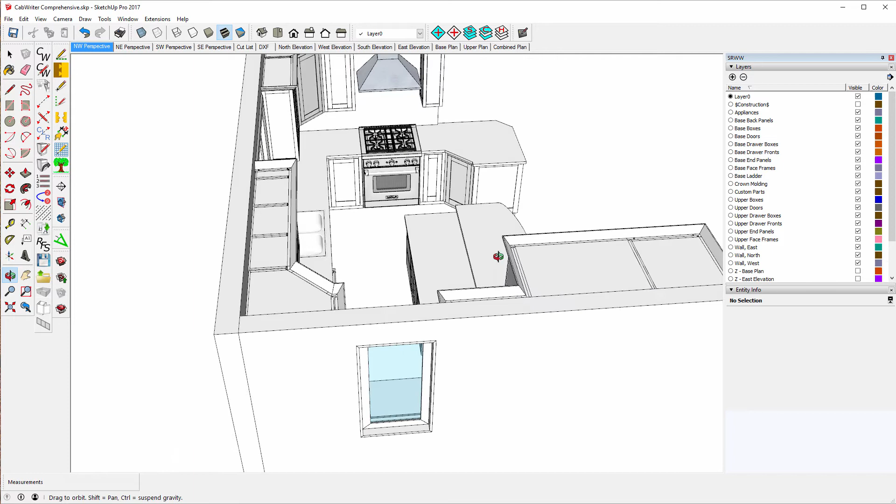This is your standard sink cabinet with the false drawers. And over here, this is a typical cabinet where you might put cookie sheets or something like that. And a diagonal base cabinet, which forms a small island, which has been trimmed with paneling on the back.

Corner cabinets, standard cabinets here, corner cabinets here and here. And I've already explained this is a divided upper, and this is a standard upper cabinet. So we've got a little bit of everything.

And we're going to go through this entirely. I'm going to do it in multi-parts, and I'll try to keep the pace somewhat slow so that you can actually follow along. The whole goal here is to learn CabWriter with all of its little secrets, if you will.

So let's get started. Probably the best way to start out is to look at how you start a CabWriter project. Oh, before I do that, let's stay with this for the moment.

Once you have actually created the cabinet design with all the cabinets and all of the trim and everything else you want to put in it, you want to create a number of scenes. And here are a set of typical scenes.

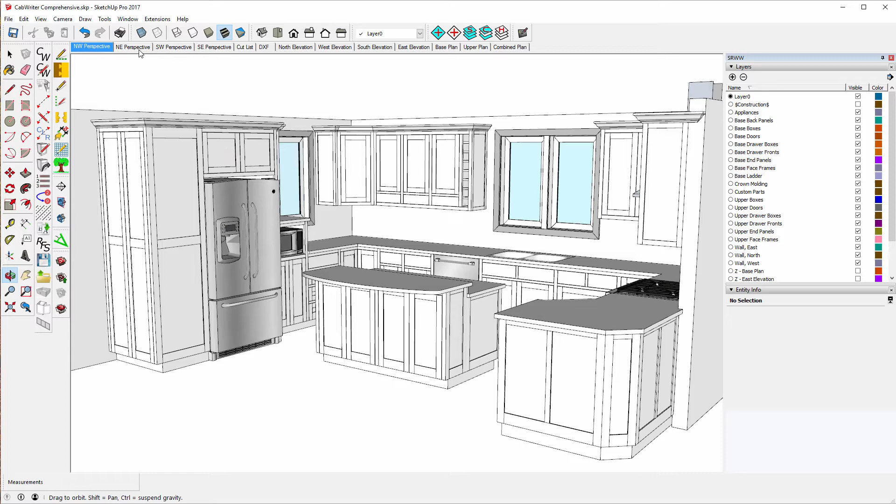In other words, it looks in this corner between the north wall and the west wall. I've got a northeast perspective, which looks in this corner between the east wall and the north wall. And then, to see the fronts of this cabinet and the island, I have a from-above southwest perspective. In other words, it looks at the west wall—I'm sorry.

That really should say southeast perspective, because it's actually looking at the east wall and the south area. So that's mislabeled. Here you can see the oven, the hood, and the front of the diagonal cabinet.

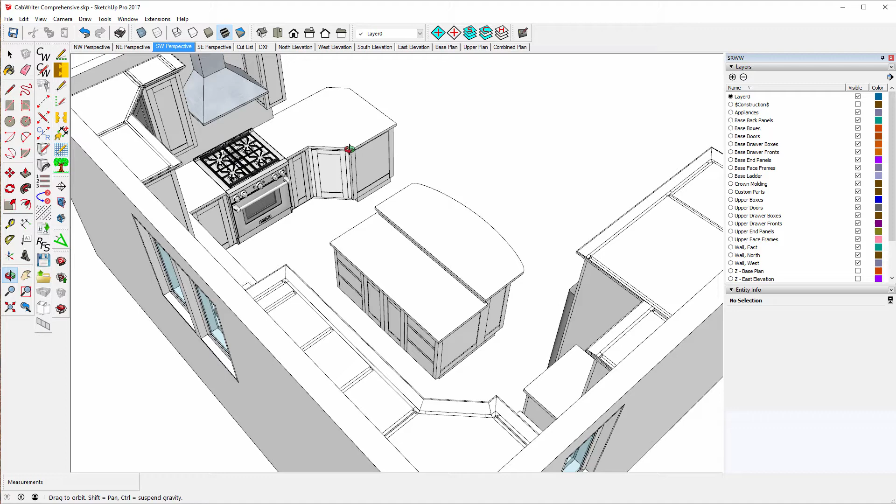And of course, now we've got the southeast, but what is really the southwest perspective. You can see the island, the refrigerator, and the microwave oven, and what have you. So these are just various perspectives to give the client a good view. Of course, you can always rotate around here and get a good view too.

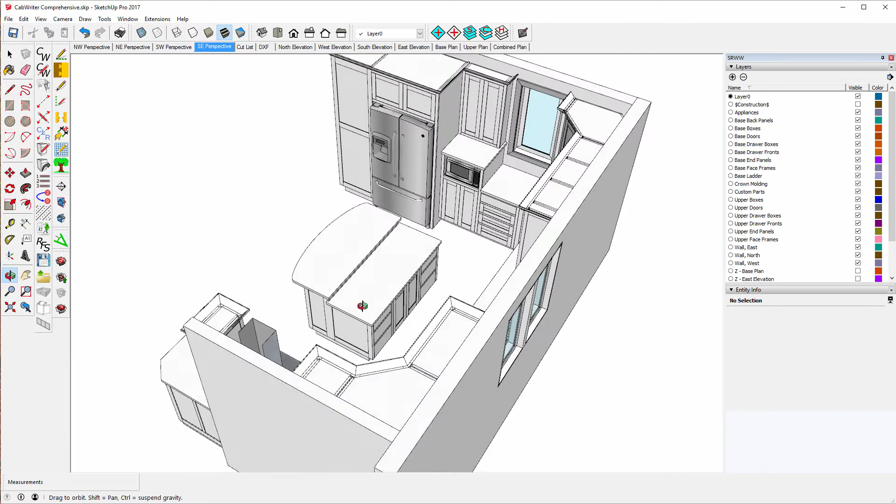And then we get to the important views for creating shop drawings. First thing we want to do is create cut lists. Normally what we want in a cut list is all of the hardwood, all of the sheet goods, all of the trim, or anything else that's in the project that is going to exist as raw materials in your shop so that you can mill parts. And that's what we put in the cut list.

And from there we can create a cut list, and it's simple. I'll show you what you want to do from this cut list scene. By the way, the cut list scene probably wants to be drawn in isometric, or what we would call parallel projection. In fact, all the scenes except these perspective scenes want to be drawn in parallel projection.

In order to create a cut list, all we need to do at this point is select everything: Edit, Select All, and then File, Cutlist Bridge, export to either Cutlist Plus FX or export to Microsoft Excel or OpenOffice, whatever it is you have that supports your process.

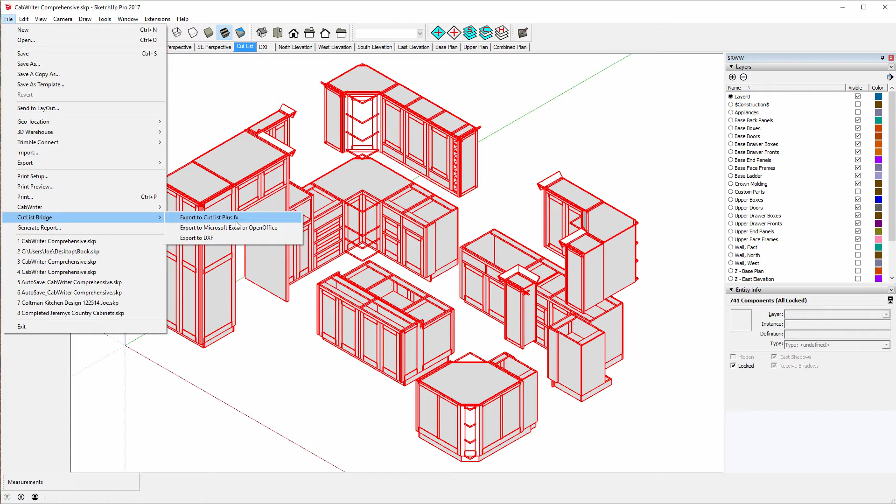I'm going to say export to Cutlist Plus FX. Very quickly, I get this dialog box that says a cut list has been written to. Now it's going to place that file called CabWriter Comprehensive.cxp, meaning CabWriter export.

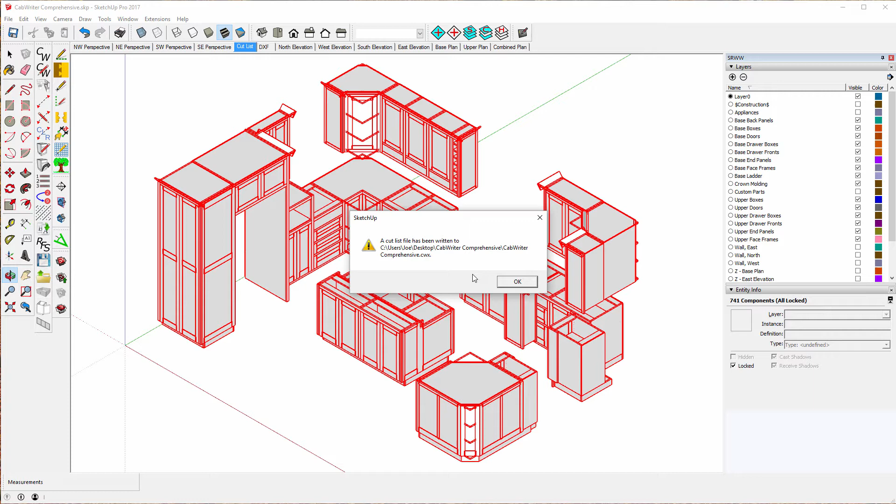And it's going to place it in the same folder that the model itself is in. So wherever this model is, you will have a CabWriter Comprehensive.cxp. The reason for CabWriter Comprehensive is that's the name of this model, and it's the name of this course, so it's the name I used for this file. I'll show that to you in a moment.

The next thing we want is we want to export our DXF files for CNC cutting. In the CNC view, what we want are sheet goods, because that's what we're going to cut on a CNC machine. So this just has all of the sheet goods.

As we go through designing this model, or drawing this model—actually it's already designed—as we go through drawing this model, you'll see what happens with sheet goods and what layers they go on, and so on and so forth. But let's not pay attention to that now.

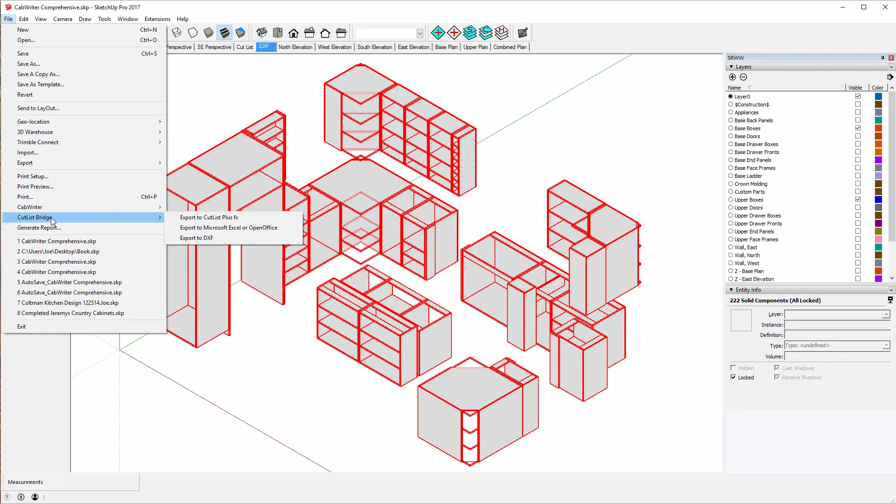All we really want is to be able to select the DXF scene, say Edit, Select All, File, Cutlist Bridge, Export to DXF. Again, this time what it's going to do is put a folder in the same place that this file, this model, is. So wherever your model exists, it will put a folder with a bunch of DXF files in it in that folder.

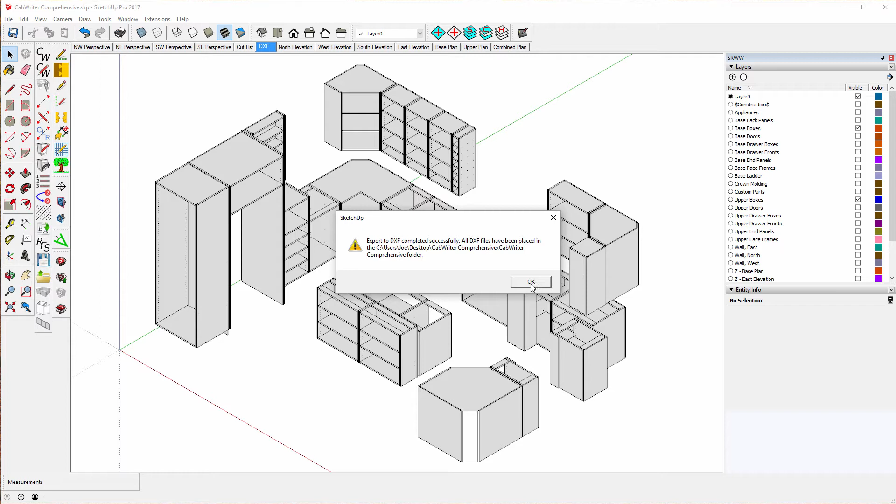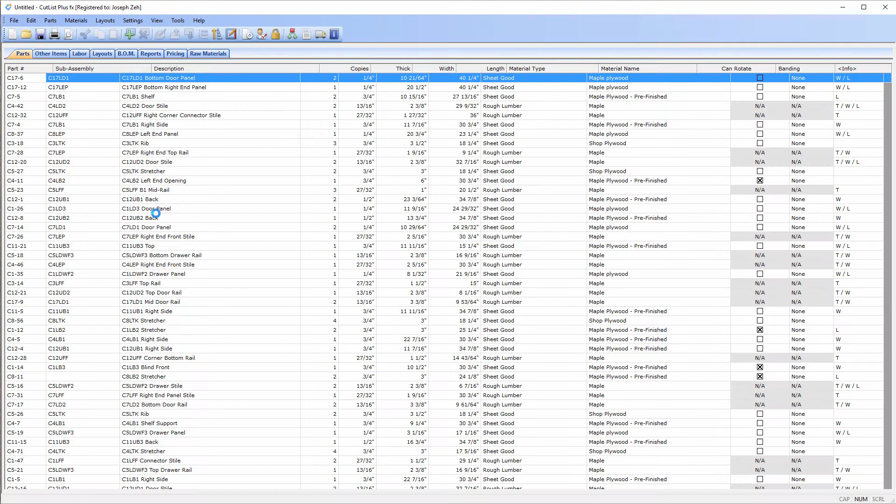So let's now go look at the files we produced. We'll start with the Cutlist file. Here in the CabWriter folder, where the model is, here's the model we've been looking at, we find the CabWriter Comprehensive.cxp file. All we need to do is click on that, and the CabWriter Cutlist Plus FX file opens up, and we can see all of our parts.

And there are a lot of them. I can do a number of things, like sort by part numbers. If I go to the top here, some pieces don't have a part number or a subassembly.

Those are simply the crown molding pieces that are around the top. But all of the cabinet pieces have part numbers, starting with C1, and not necessarily going in order, because the way sorting is done with characters like this is you go from C1 to C10 to C11 and so forth, and then start at C2. But anyway, they are sorted by cabinet number.

C1 is cabinet 1, dash 1, which is part 1 of cabinet 1. And you can see cabinet 1 has, somewhere in the neighborhood of, well, cabinet 1 has 55 parts. And each part has a subassembly number.

For instance, C1L—L means lower cabinet, and B means box. So this is box 1, box 2, box 3. It's a 3-box cabinet, so these are the box parts. These are the drawer parts, the drawer front parts, face frame parts, so on and so forth, toe kick. So they're organized by subassembly.

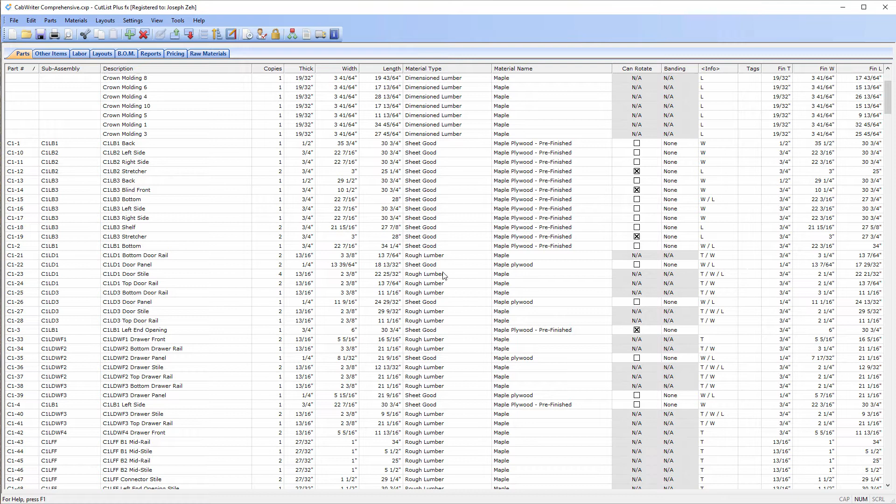Okay, so that's all of the parts, but what we really want are layouts. And there we have it, the layouts. Now, I've got a bunch of different types of material here. I'm going to choose the maple pre-finished 3/4 inch material. We'll see all of the sheets that are used in this design.

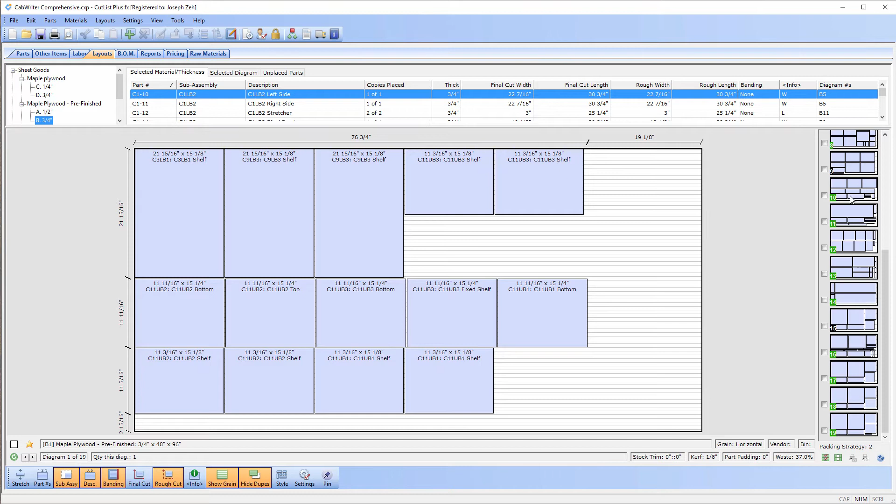There are 19 of them, and you can see each sheet here, and if you want to see each sheet in detail, like this one perhaps, you can bring it up here and look at it in detail. Notice if we start at the bottom and look at this, how the sheets are used very efficiently, very little space left over. All the way up to the top, the last sheet has some offcuts, but that's it—everything else has been used and used very efficiently.

So this program called Cutlist Plus FX is not part of CabWriter and it's not part of SketchUp. It's Bridgewood Design, who designed and sells this. It's a very, very useful application. Of course, the most important part of it is plywood optimization, but it also gives you things like a bill of materials—it tells you what this thing is going to cost in terms of materials. It also creates some really nice information that allows you to create a project costing.

If you provide things like taxes and other things, and hourly wages and that kind of stuff, and how long it takes to do each sub-assembly, you get a project costing sheet with all kinds of reports that you can choose. But the most important part and the most efficient part is this layouts thing.

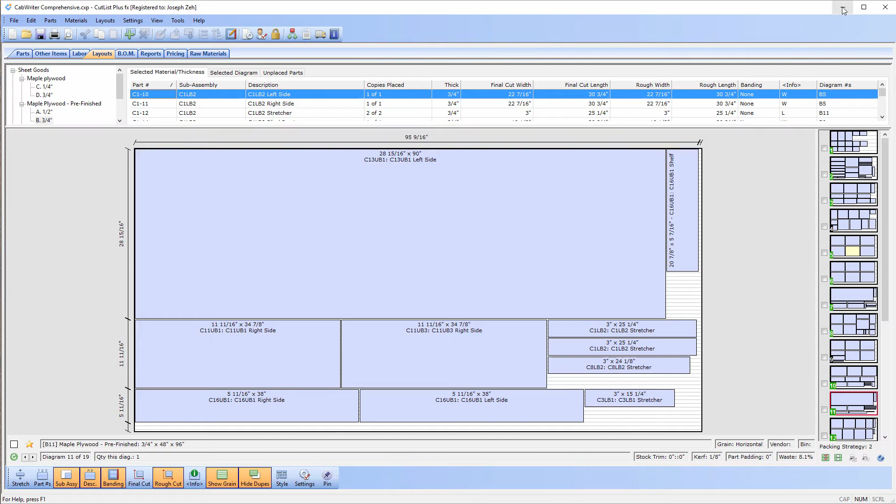All right, so that's one type of cut list. If you're going to go to a CNC machine, you might want to go to something like Cut2D Pro, and that's why we produced this folder with all of the DXF files. We're going to look at the 3/4 inch maple plywood pre-finished again, but this time in Cut2D Pro—again, a third-party application.

Let's start a new project here, and the material is going to be roughly a 4x8 sheet of plywood. We will import vectors from this folder that we exported, and I'm going to use the 3/4 inch maple plywood pre-finished. I want to preview them—this will take about 10 seconds here as it works. You can see it working along the bottom here.

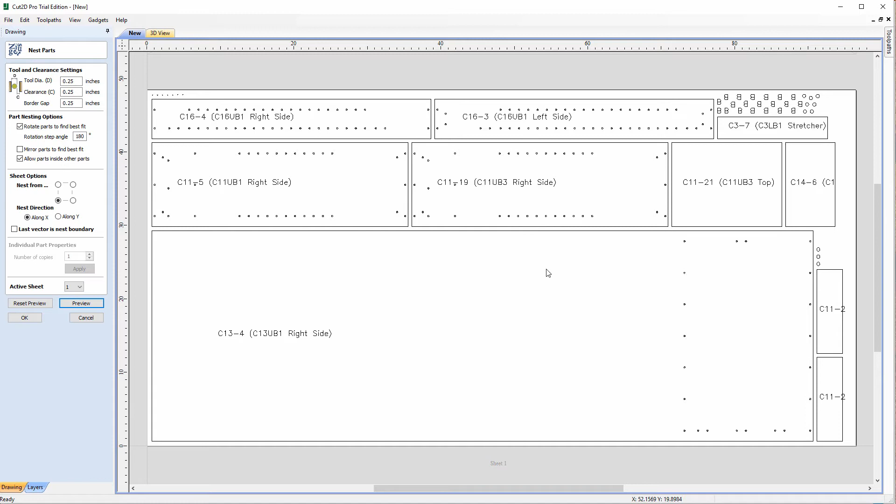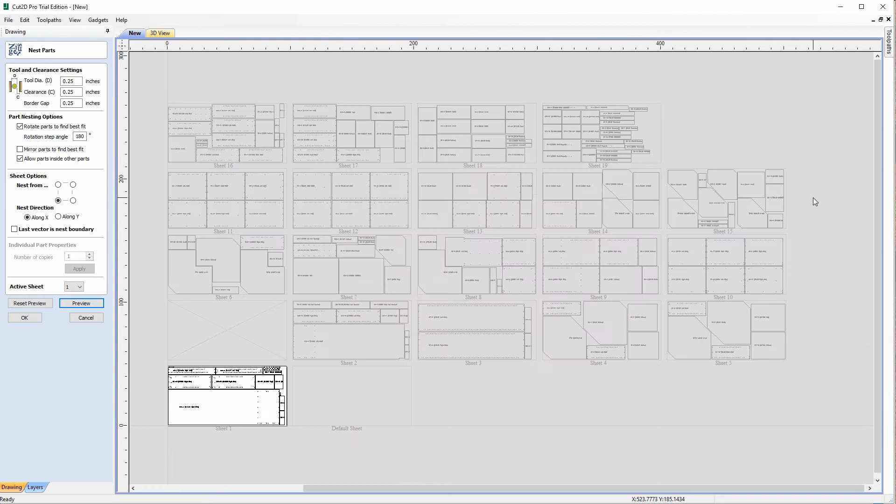And there we go, this is sheet number 1 right here. And if I want to see some other sheets, I can scale this down. Let me scale it up just a little bit and see if I can center it. This is a very difficult program to operate in terms of centering.

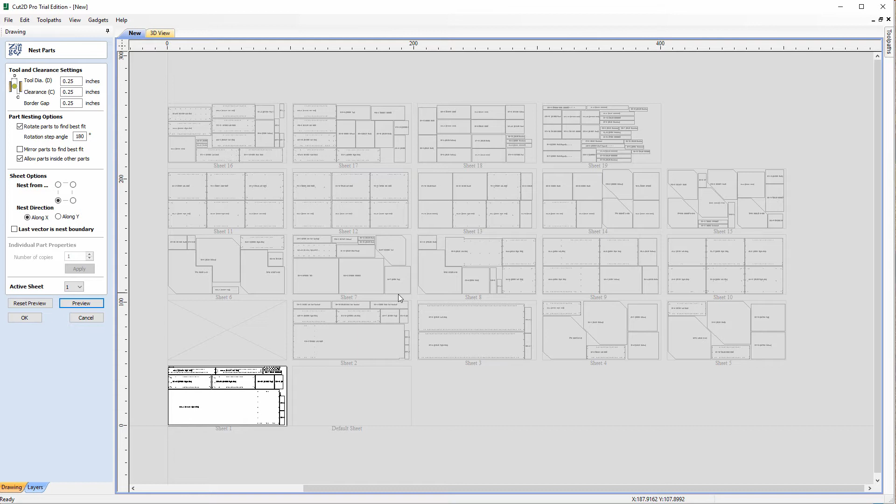Okay, so this is sheet number 1, and this up here you can see is sheet number 19. So again, it uses 19 sheets, but you can see it's laid them out—you can see the part number, the part name, the component name, and all the holes that are going to be drilled by the CNC machine and the shapes that are going to be cut out, all of these diagonal shapes and what have you. And again, it's optimized to 19 sheets with very little offcut.

So this particular program, Cut2D Pro, produces the software necessary to go directly to a CNC machine. I'm not totally aware of all the different types of CNC machines it supports, but a large number.

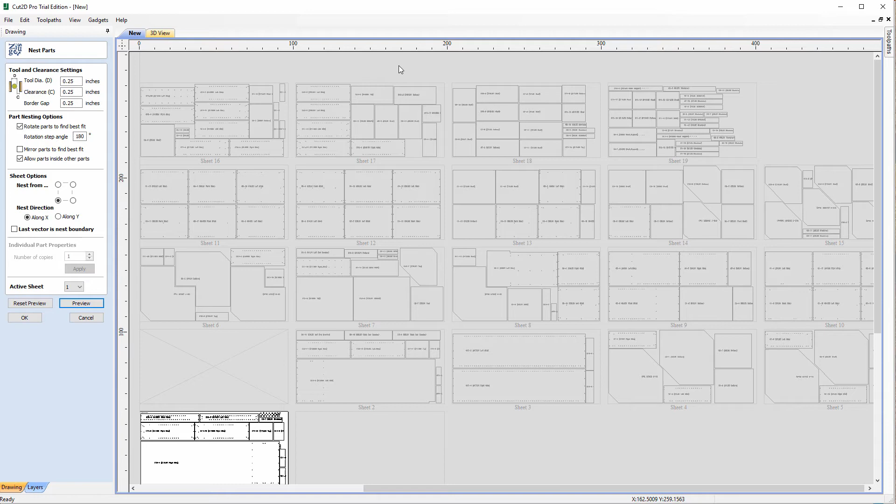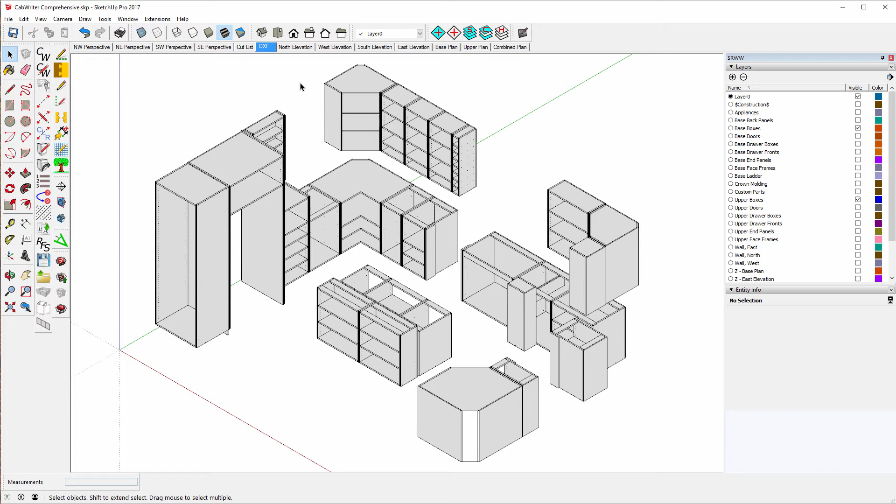Okay, so let's go back to our model. The next thing we want to look at are elevations, because one of the things we're going to want to do is create professional looking drawings, and we'll do that in layout. We could do it here in SketchUp, but if you're a professional, you'll want to buy SketchUp Pro, which comes with the layout program, and you can do dimensioning and things like that with a very professional set of drawings with title blocks and things like that. To do that, we create these elevation drawings—that's the north elevation, looking at the front of the north wall.

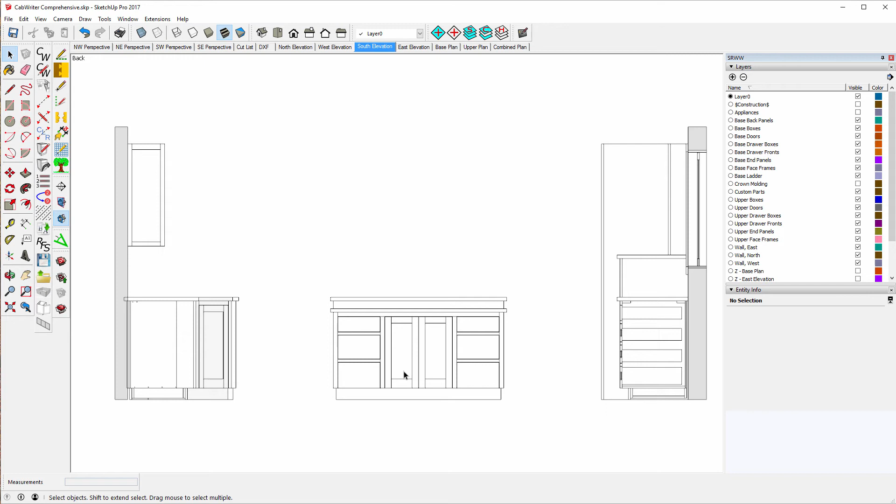The west elevation. The south elevation, that's looking at the island, standing in front of the kitchen sink, looking at the island. The east elevation.

And then you want some plan views. Here's the base plan. CabWriter produces these for you and puts them on layers for you. It automatically creates the scenes and the layers with the names that you provide.

The other nice thing it does is normally when you see a section in SketchUp, you get a view inside the parts, which you really don't want in professional looking cabinet drawings. You don't want to look into the parts. So what it does is it fills in automatically the holes where you create a section, and that keeps your drawing rather neat and allows you to dimension it.

Here's the upper plan. And you can do a combination plan, which is often important. So those are basically the major views you will use in a cabinet project.

I want to show you a couple of examples, not of this kitchen, but of other kitchens that we've done with CabWriter, and show you the professional drawings that are done in layout. And then if time permits, we'll start drawing cabinets here. And if not, we will start in part 2.

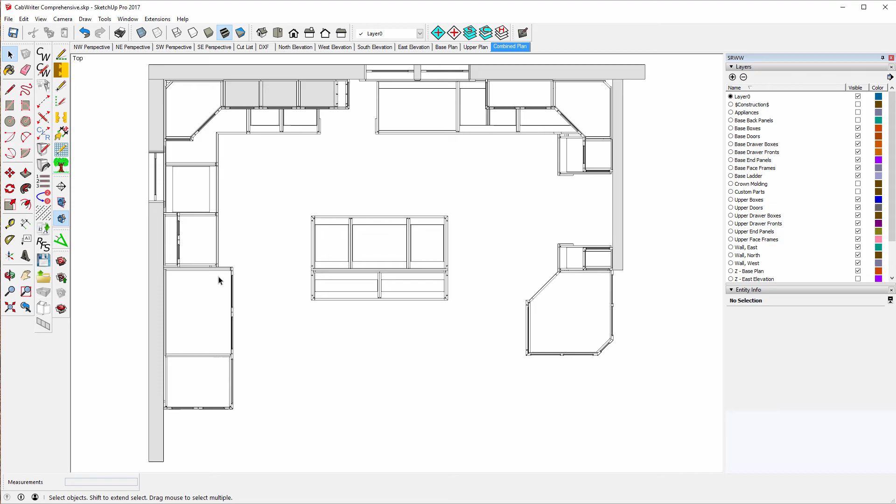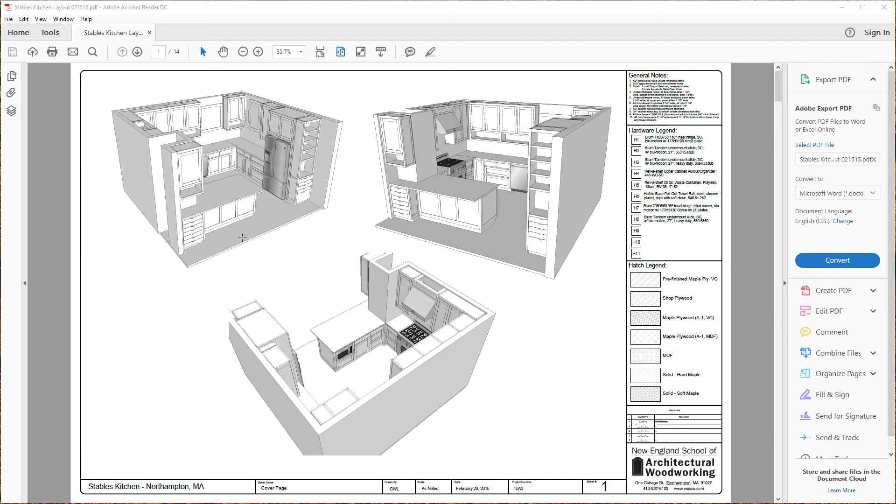So let's just take a look through. These are scenes that are exported from SketchUp into layout. So you can have a cover page here that gives them all the various views like the ones we just looked at in the model that we're using for this course. Let's go to the next sheet. By the way, this is a PDF file that was exported from layout.

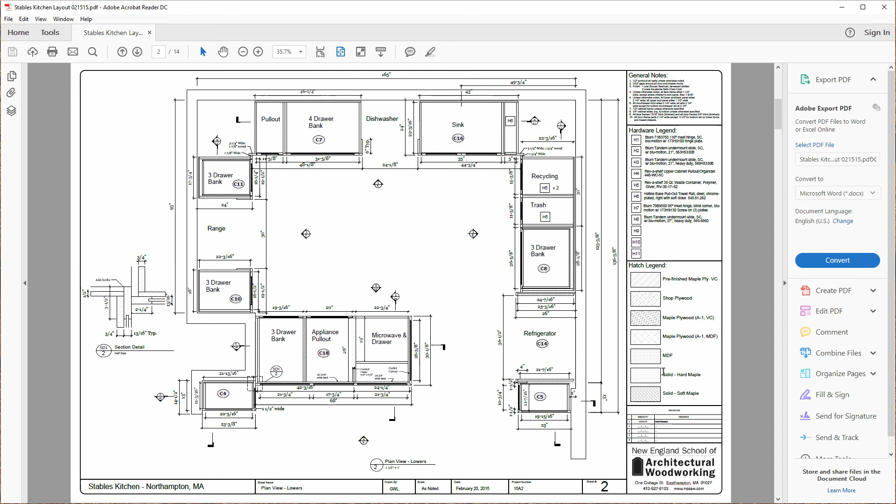Here you can see the plan view for the base, the sink, 4-drawer bank, some pullouts, appliances and things. You see all the dimensions, and again you see here on the same legend for each drawing. Let's just walk through these quickly.

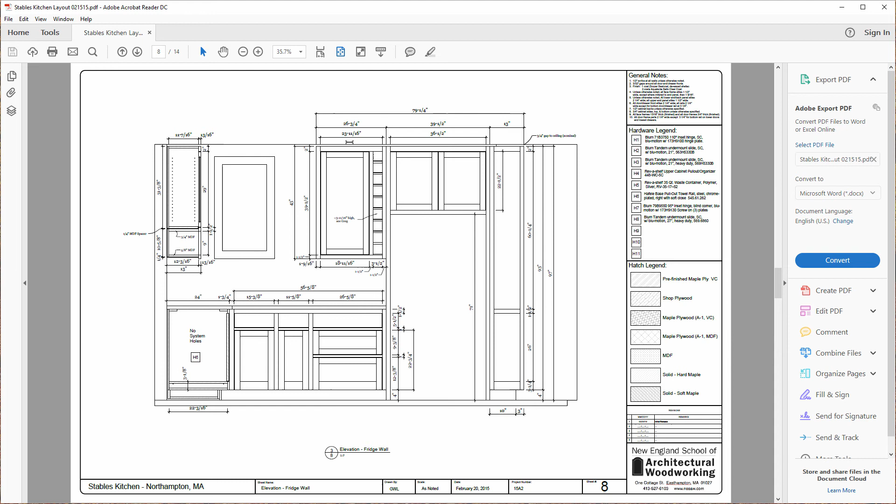And I want to go to another drawing and show you some sections that were done. Here we're actually in the layout program. There's like 4 sections I want to give you a view of here. You can see the sectioning here.

Filled in with the hatching. That's the range wall, the sink wall, fridge wall, and a peninsula.

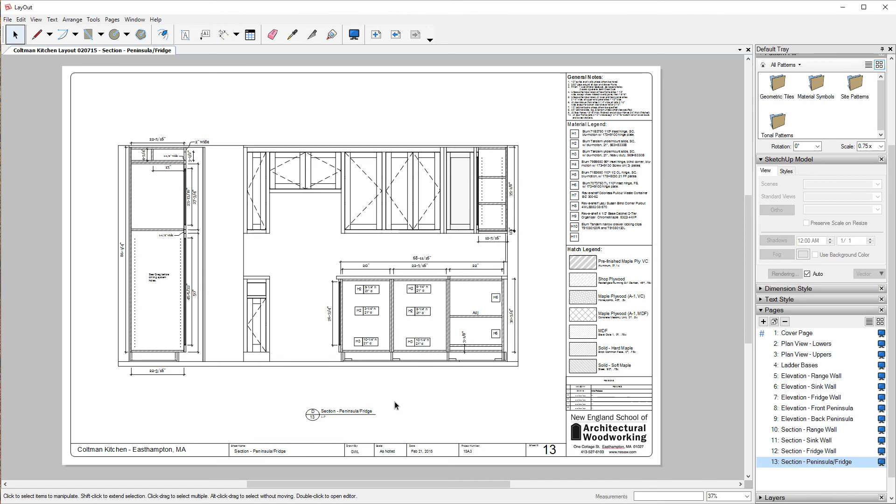Let's zoom in a little bit. And you can see the various styles of hatching that were used. They're all over in the key for the page right here.

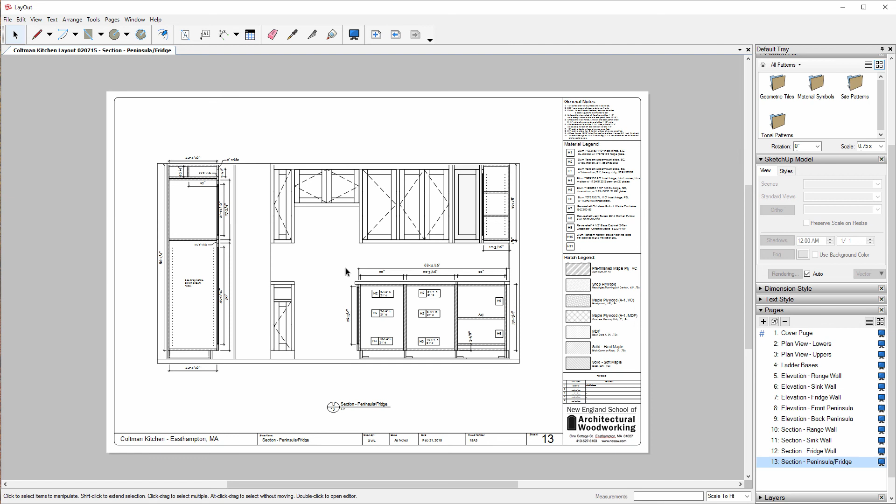You can do these very nicely in layout. Much more difficult in SketchUp. SketchUp doesn't provide any hatching capability. There is some features built into CabWriter that helps you do hatching in SketchUp, but I will be the first to admit it's not very good. Hopefully by the time revision 2.0 is out, it'll be much better. But hatching is an important part of professional drawing, so I just wanted to show that to you.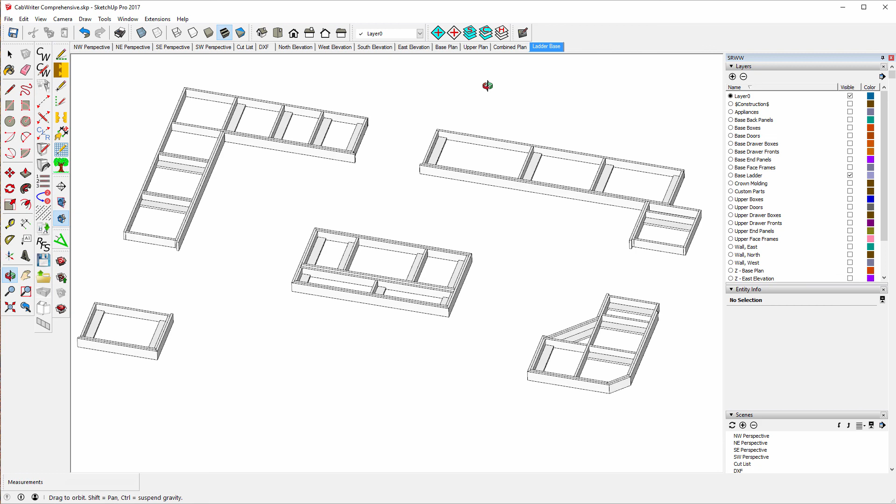And you can see them now in 3D. So now that I've got that corrected and the ladder base added, I'm going to provide you with this model so that you, as we go through the course and draw cabinets, can follow along with the completed model. Since this video is now about 28 minutes long or something like that,

I'm going to leave the beginning of the actual drawing to part 2. This will probably be, I'm guessing, a 4 to 5 part series. And so we'll try to keep them to about a half-hour apiece.